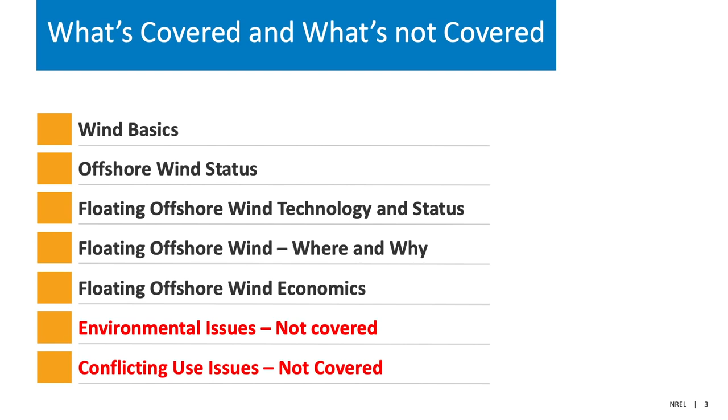I just put my bio in there. I won't cover that—Tiffany did a great job just now—but if you want to go back to this, it'll be there. I've been working with floating concepts since I started the offshore wind program, but it's really just starting to take off now.

I want to start with this first slide, which is really an introduction to the wind turbine itself. Let's look at that to start. The wind turbine configuration is a horizontal axis, three-bladed upwind machine, and I'll break that down for a minute. All commercial wind turbines fit this description, except for a few that have been built in the downwind configuration recently. But in general, this is what they look like.

The upwind configuration means they face into the wind and the wind passes through the rotor before it passes through the tower. The wind creates torque, which is the rotational force that spins the low-speed shaft, and we need to turn that torque into electricity. To do that, generally the land-based machines have a gearbox, which is the cutaway you're seeing in this picture. The gearbox speeds up that low-speed rotation and directs it into the generator where electricity is produced. So the machines all work this way.

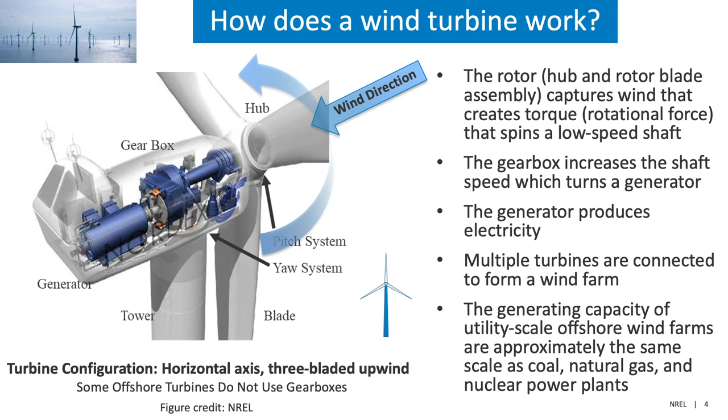The first project in the United States was the 30 megawatt Block Island wind farm, shown here in this figure. It's comprised of 5 6-megawatt turbines that were originally Alstom machines, now called the GE Haliade turbines, 6 megawatts each, installed in 2016 off of Block Island.

To this date, this is the only offshore wind farm in the United States. You can see it in the picture, especially the one to the right, in relationship to where it is on Block Island.

These turbines can provide enough power for up to 16,000 homes in Rhode Island. If you can see the island of Block Island, there aren't 16,000 homes there, so most of this power is used on the mainland. When they built this wind farm, a cable was brought to the mainland shore of Rhode Island, coming ashore at Narragansett, powering most of the homes in that region.

So this is a very small wind farm. It was the first one, and it's still operating, of course.

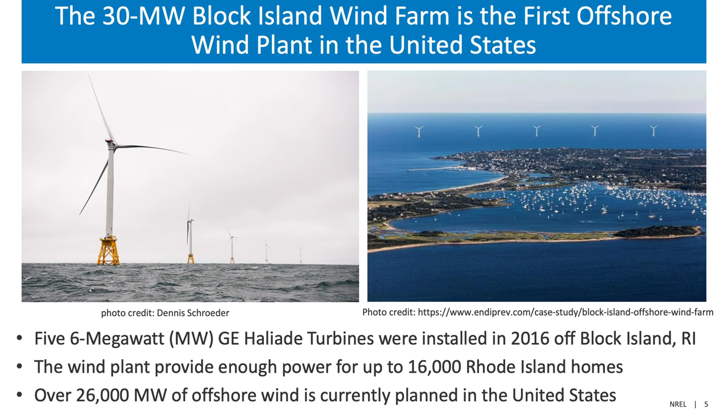But there's now over 26,000 megawatts of offshore wind currently planned in the United States. This includes, depending on how you look at it, either the regulatory lens through the leasing system, or the policy lens in which states have committed specifically to build offshore wind power in their region. Most of this is happening on the East Coast, but it's starting to spread into other areas where we might see floating wind. This is a floating wind presentation, and I'll get to that in just a minute.

So more basics. How much power does a Block Island wind turbine make? These are 6 megawatt wind turbines. They're big for land-based machines, but today they're actually becoming small in terms of an offshore project. You can see this picture taken in 2016 off a boat, and these are the turbines.

One of these turbines would have a power curve that looks like the curve on the right side. This is how all turbines generally look in terms of their ability to produce power, where the wind starts up, and this scale is in meters per second. If you're not used to meters per second, I put the conversion factor at the bottom: 2.24 miles per hour equals 1 meter per second. At 3 meters per second, roughly 7 miles per hour, you start to get enough wind to cut in. That's where it starts to ramp up.

Now it goes up in a cubic relationship in region 2 of this power curve until it reaches a point around 11 meters per second where you reach rated power. That's the rating on the generator, at which point the turbine can't generate any more power, so it starts to regulate power using the pitch control system throughout the rest of the power curve, and that's called region 3.

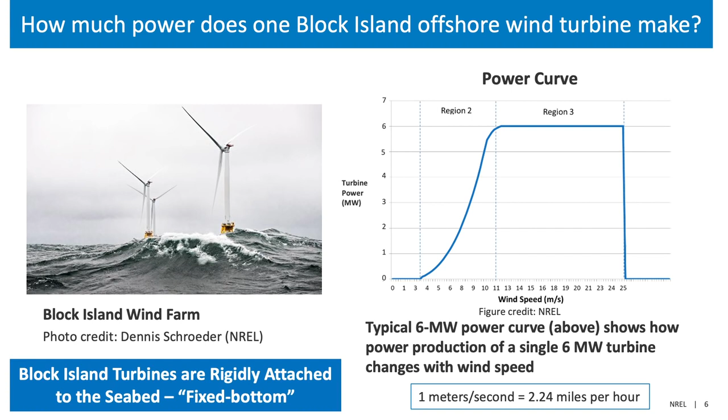So a floating machine is quite different, but a lot the same. This next picture shows some of the parts of the wind turbine that are above the waterline. A fixed bottom offshore wind turbine and a floating offshore wind turbine might look a lot the same, depending on the substructure that's used. You can see this turbine on the right is actually a floating machine. It looks a lot like the fixed bottom machines because you can't really tell if it's fixed to the bottom.

The fixed bottom machines that we use are a lot the same as land-based machines actually, but they're bigger and have much more complex support structures that have to be installed out in the ocean. They're designed to withstand the harsh conditions of the marine environment, like corrosion, and they have to be maintained in that environment as well.

The floating turbines look similar, but the big difference is that they're supported from the bottom by buoyant substructures. Those are moored to the seabed, so they're floating, but they're moored through cables and lines that connect to anchor systems.

Before I move on, I want to clear up a couple things about terminology, because people get confused when I refer to the support structures, which some people call the foundations. The substructure is actually a part of the support structure - it's the part that the tower is attached to. The support structure includes the platform, as well as all the mooring lines and the anchor system. Some people might call that the foundation, but the foundation is really just the part that attaches it to the ground. I'm using the terminology that the engineers use to design these.

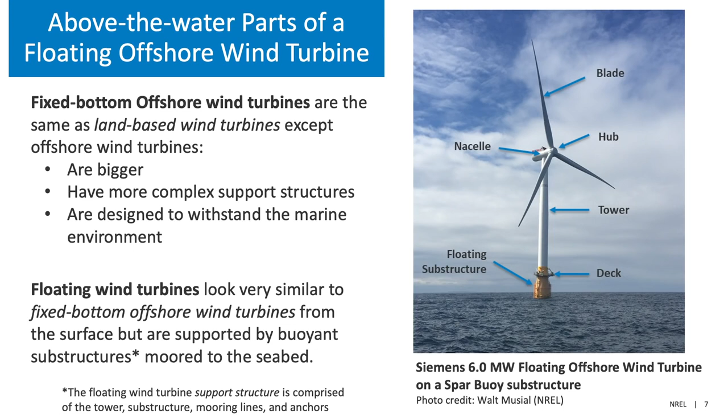When we get into the differences between fixed bottom and floating, there's kind of a cutoff line of depth. They're very depth dependent. Almost everything installed so far has been in depths below 60 meters and therefore has been fixed bottom. The new technology emerging for floating is really addressing applications where the depth is above 60 meters, and that's shown in this picture.

Below the waterline, these are artistic views of different types of foundations, different types of substructures. There's the monopile, which is the most common, and then there's the four-legged jacket, which is the kind of substructure you saw in the Rhode Island, Block Island pictures. And then beyond that are these floating systems, which I'll spend more time talking about in just a minute.

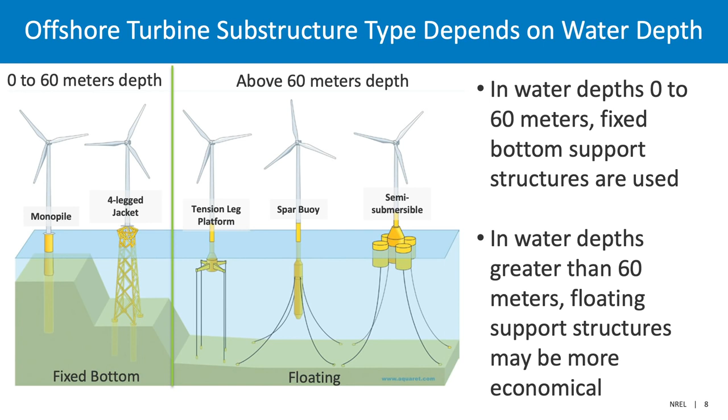Looking at this same picture on the right, if you just stick to the fixed bottom systems, there's 27,000 megawatts installed globally in the fixed bottom type. Of the floating type, there's only 82 megawatts - that's 0.3% of the total installed capacity. We're just getting started, people. That's what this slide is really telling you.

We're excited about the floating industry. The established fixed bottom industry is already going, and I included a few of the leading countries that have installed over a certain number of megawatts. These are the top 7 countries in the world with installed capacity of offshore wind, but this is all fixed bottom technology. For floating, we're just getting started.

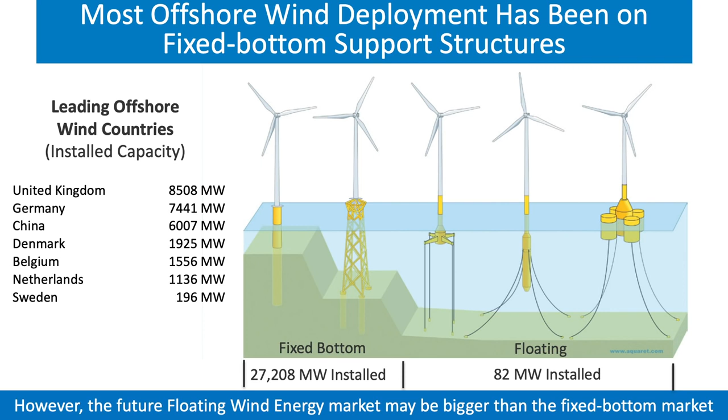So why are we excited about this? It's because 80% of the offshore wind resources in the world that could be feasibly developed are greater than 60 meters deep, which points to this technology.

If we use floating technology, we'll be enabling sites that are further from shore, more out of sight than the fixed bottom systems, and they tend to have better winds. So the economics and the feasibility of floating is in our favor in a lot of these areas.

We're already starting - we already have 82 megawatts installed, but a lot of that is just starting to accelerate right now. We expect that we'll see floating technology at the utility scale, meaning 600 megawatts to 1,000 megawatts per project by the year 2024. That's only 4 or 5 years away.

Some of the areas being considered globally are circled on this map, and you can see it's the west coast of the United States, of course, where we've done a lot of looking already. Some of the East Coast and Great Lakes, areas in Europe that are now moving in that direction, South America, and then Asia. This is going to be a global industry, and we're excited about the possibility of moving and adapting the technology for floating.

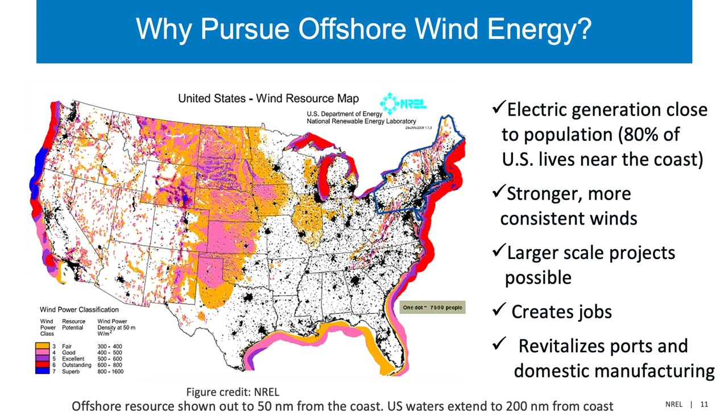By developing this industry, we're going to create a lot of jobs—I have some targets on that at the end—and it's already revitalizing a lot of the port and coastal manufacturing supply chains that were dormant from the loss of shipping industry and other things over the years. Some of those facilities do exist, and we'll be upgrading them.

Now, here's another resource map. This is the one we actually use, based on wind speed, where darker red colors represent higher wind speeds. The best sites are where the wind speeds are strongest but also where the water isn't too deep—even with floating wind, we don't want to exceed certain depth limits. So we base our resource assessments on a certain depth limit, and we've set these technology filters to do that.

So this map is only showing wind resources in areas where the water depths are less than 1,000 meters and where the wind speeds are greater than 7 meters per second. There are a few conversions there in case you prefer miles per hour or knots: 7 meters per second is 15.7 miles per hour and 13.6 knots.

Given these assumptions, the U.S. wind potential is approximately 2 times greater than U.S. electric energy use. So there's a lot of resource there, and offshore wind can contribute a lot to our total generation portfolio. Of course it's not the only thing we'll rely on, but especially in coastal communities, we can use it to supplement renewable power.

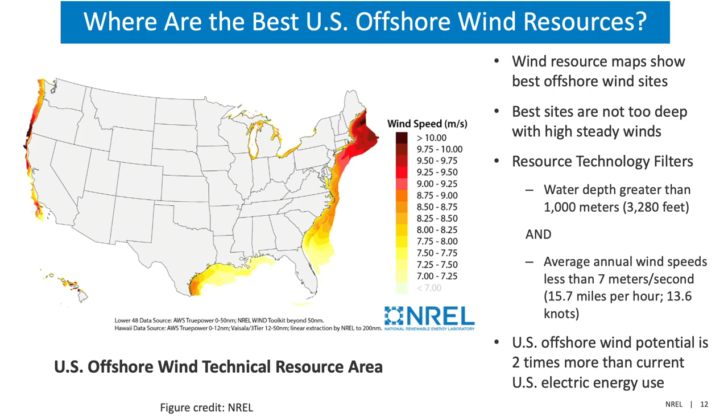I don't have a lot on regulatory, but I do want to show what's happening, and most of this is in the fixed bottom industry. These are maps covering regulatory activity in the United States—most people might recognize that I've sliced out the East Coast, the West Coast, and Hawaii here.

There's very active leasing going on through the Bureau of Ocean Energy Management, which has regulatory authority over the outer continental shelf, extending from 3 nautical miles to 200 nautical miles. Over the last approximately 8 years, they've granted 15 lease areas in the United States, giving developers exclusive site control of up to 25 gigawatts of development capacity. That's what we typically refer to as the regulatory pipeline.

We also have the policy pipeline, which is about the same—a little bit more now. BOEM has also identified 13 call areas. A call area is a potential wind energy area under public review. It might become a wind energy area, or it might not, or it might change in scope or dimensions—we don't know yet, and we haven't counted the call areas in the regulatory pipeline up to this date.

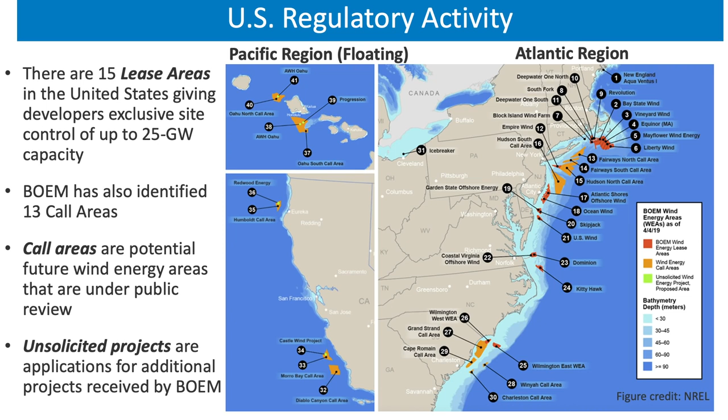There's also another category: unsolicited projects, which are applications for additional projects that BOEM has received. For any reason, a developer can submit an application for a project, but it still has to go through a regulatory process that includes some attention to whether there's competitive interest in that area. I don't have a lot more on regulatory, but that's something maybe for another topic.

So in the United States, we have areas where floating might be considered. This map was drawn in a different way, based on our bathymetry. There are two colors here: a light aqua color and a dark blue. The light color indicates areas where our techno-economic models predict that fixed bottom technology will be superior.

The dark blue indicates areas where the models indicate that floating might be superior, and you can see there are many areas where floating technology might make more sense. Of course, these boundaries can change as technology changes, but north of Boston, north of Massachusetts, the shallow water goes away. On the West Coast, there's virtually no shallow water unless it's really close to shore, and in Hawaii I'd say the same thing. The Great Lakes might stand out as having no deep water, but that's not the case.

When we did the resource assessment, we eliminated all the deep water because at the time, the resource for deep water was considered unfeasible for the technology in the Great Lakes, since ice floes and freeze-overs in the winter could potentially prevent the current technology from being successful year round. There's been a lot of talk about reassessing that position, and the technology for deep water in those conditions is considered possible by many people now.

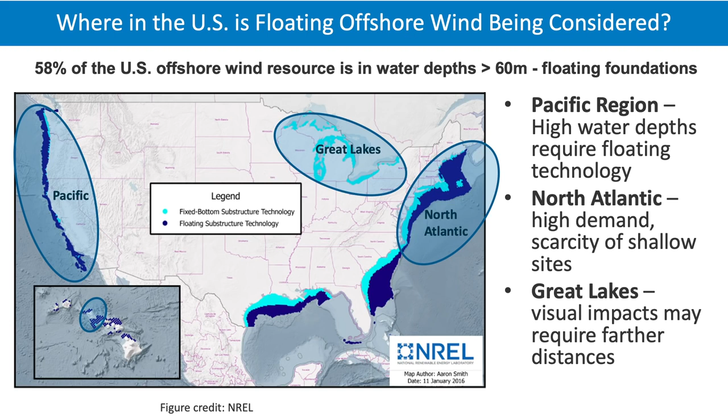There's likely to be a push toward floating because visual impacts may require further distances, especially in populated areas. So those are the areas we're looking at. There's certainly arguments for the South Atlantic and the Gulf of Mexico, but both of those regions have lots of shallow water.

From the technology standpoint, we're leaning heavily on the oil and gas experience that helped accelerate the first generation of floating wind turbine prototypes. We're past that point now and moving toward a pilot stage. The basic substructures used were derived from the oil and gas industry, but we're finding that the criteria used to design an oil rig, if used alone, can result in safe and successful designs, but they can be bulky and expensive.

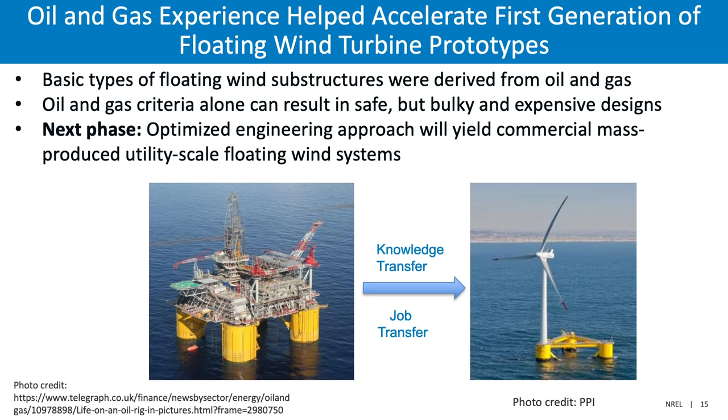So the next phase is likely to be an optimized engineering approach, which could yield commercial, mass-produced, utility-scale systems. We're seeing that right now, and there's a lot of knowledge and job transfer coming in from the oil industry. The oil industry is heavily involved in the early phases of the offshore wind industry, because a lot of those skills transfer directly.

So the characteristics of the basic floating platform types are as follows. You can see this illustration of three different types, relating to three platform types that get their static stability through different methods. One is a spar, which has a deep draft but achieves stability through ballast weights installed very low. The semi-submersible is a low-draft system with a wide footprint on the water plane where it distributes its buoyancy, challenged by high exposure to waves and structure above the waterline, since a lot of the steel has to be right at the waterline.

For a tension leg platform, shown on the far right, it achieves static stability through mooring line tension, with a submerged buoyancy tank. These can be the lightest weight systems, but the problem is they're unstable until you hook up the mooring lines, and they have very high vertical load mooring line capacity. So the anchors have to pull up at about 10 times the force of the other two, the spars or the semi-submersibles.

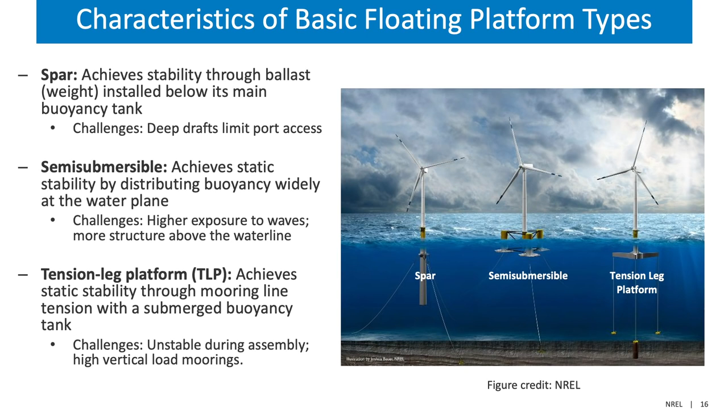From a surface view, there are two types of platforms shown here - one's a semi-submersible and one's the spar - shown so you can visualize what they look like from the top. You can tell the semi-submersible because you can see the structure. With the spar, not so much.

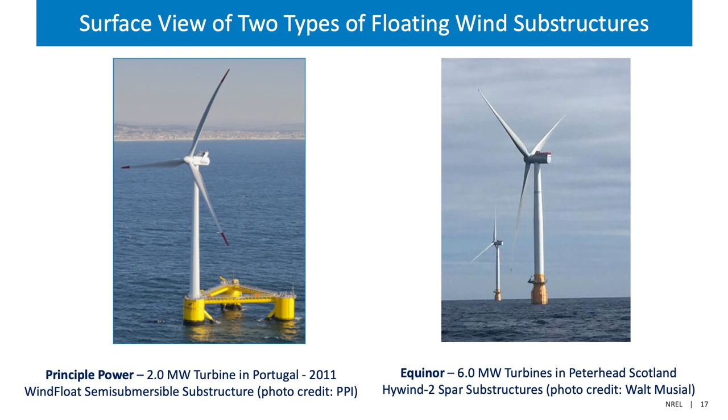So if you look at this illustration, it shows some of the other pieces now. I'm going to focus on the non-turbine equipment. We already talked about floating substructures, and the dynamic array cables connecting the turbines create a lot of the infrastructure and cost of the system.

And then there's the mooring and anchor systems that connect the platforms to the bottom, and the installation and assembly, which is not shown in the drawing, but this is really the equipment that has to be deployed to install all these, both in the harbors and out at sea. And then there's the substations, both offshore and onshore, the export cable that connects between them, and then there's some costs associated with decommissioning that happens 25 to 30 years after they're installed, because that's their expected design life.

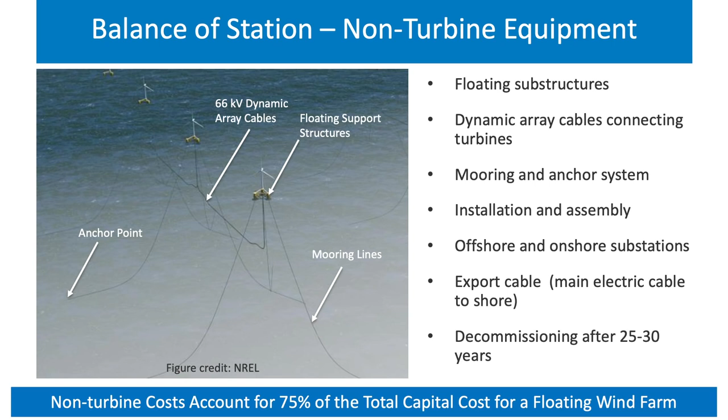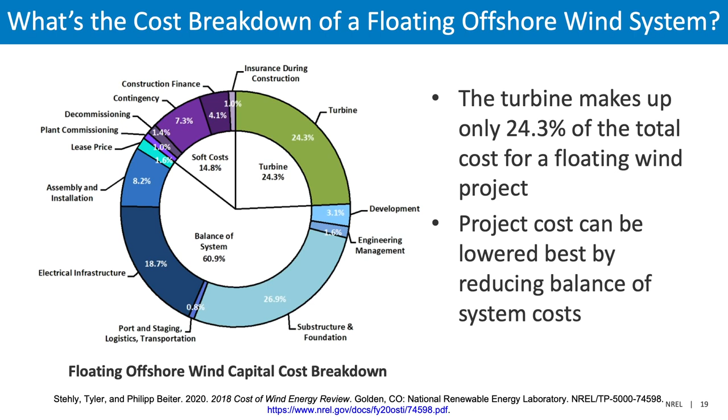So focusing on that bigger part of the pie is the best way to lower the system cost or the project cost if we're looking ahead to reduce costs. So I'm just going to go through some parts of the wind farm that we already talked about, just so that we have a better technical understanding.

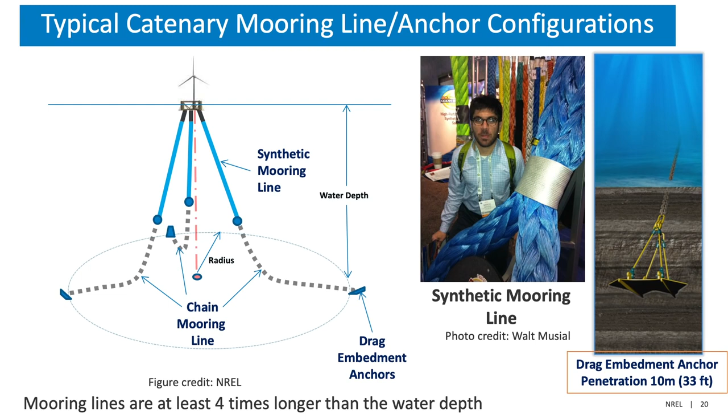Now this is a new innovation that allows us to lower the cost of the wind plants. The electric cable costs will increase as the turbine spacing increases, and decrease with turbine size, because with fewer or larger turbines, you need to connect fewer turbines, and the cable costs go down. But the exact spacing of these turbines is really a trade-off between wake losses that happen in between the turbines and array cable costs. So the larger the spacing, the more cable you need and the more expensive it gets, but you have less energy losses.

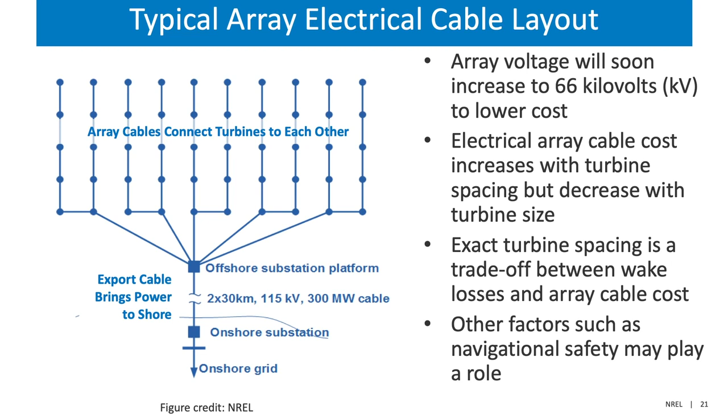So other factors also could play a role, such as navigational safety, and this has been brought up in some negotiations earlier among projects that are going in on the East Coast. So this is something that needs to be discussed, and it's not really part of this discussion here.

But I do want to touch on how turbine spacing is determined and how it might change as projects get bigger. Turbine spacing is based on the rotor diameter, which is the diameter that the blades sweep as they turn around. One rotor diameter on a big GE machine is 220 meters. But to create adequate spacing, the machines have to be somewhere between 6 and 8 diameters apart. I've seen projects as low as 4 diameters, maybe up to 10, but typically in between that.

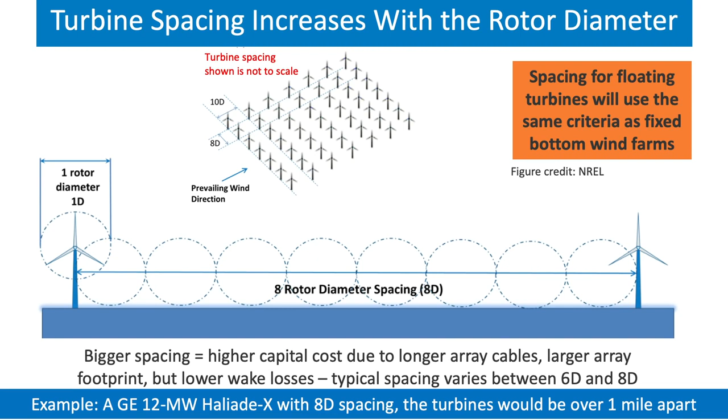I guess that's all I'll say about that, except for the fact that when we go from these fixed bottom arrays to floating, we're going to use the same criteria and the same physics results. There's some advantages we can talk about, but I'm probably not going to get to that today.

Well, how big will that circle be? It really depends on the design. It depends on how long the mooring lines are, the water depth, the design of the mooring system, and also the turbine size. So you can appreciate that the turbines aren't necessarily exactly fixed in space.

They can move in actually 6 degrees of freedom as they're anchored to the sea bottom. And that can affect some things, but generally the platform's job is to control that motion and to make sure that the turbines are protected from excessive wave action and things that might damage them or cause additional fatigue.

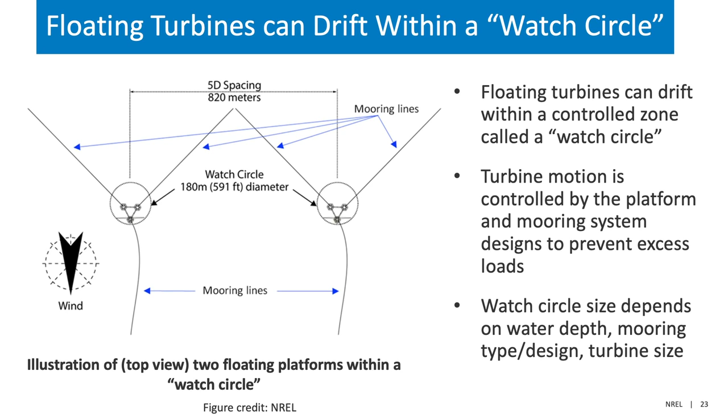So all these turbines have dynamic array cables. That means that the turbines are moving, the platforms are moving, and we have to protect that power cable from bending and breaking because of those turbine motions.

So there's all kinds of protection systems that are involved in the dynamic array cable to protect the static part of the power cable from seeing all those deflections and motions. They help to isolate the cable from those platform motions.

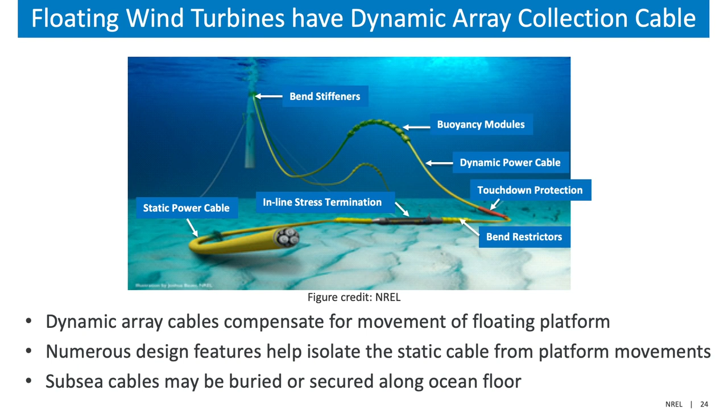And then those subsea cables can be buried, which they typically are for fixed bottom systems, or if it's really deep, they may just be secured with a mattressing system or some other means. And that's part of the design.

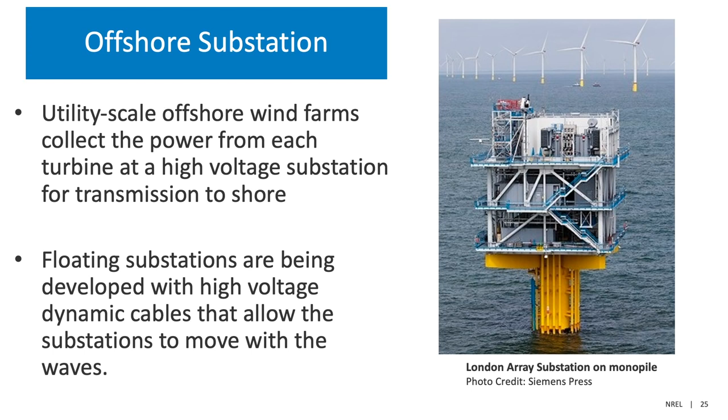They all connect to a substation. Now, I don't have a picture of a floating substation because I don't think there is one that has been built yet, but we're working on the same concept as this one. This is one from the London Array, a fixed bottom substation. Chances are a floating one will look very similar, but it will have dynamic array cables attached to it. These are under development right now.

A big part of floating, and a big difference between floating offshore wind and fixed bottom offshore wind, are the port and infrastructure requirements. We envision that floating systems will be mostly assembled and constructed at quayside or at a wharf facility, meaning a lot of the assembly and commissioning will happen there too. That's a good thing because it will avoid a lot of the labor at sea, which is very expensive and can be more dangerous than labor conducted in the harbor.

So we need wharf facilities that are adequate, and they need to probably be upgraded or built from the existing ones. We need a navigation channel and wet storage that will allow the tow out of a system with the drafts that are being designed. And most of the platforms designed so far are semi-submersibles because they gravitate toward low draft systems that are easily towed out.

We need an upland yard for laydown and storage and staging of the parts. We need cranes with very high capacities, not just in how much they can lift, but how high they can go. The crews and access for maintenance don't have to be co-located in the manufacturing ports, and they don't have the same restrictions. A lot of these assembly ports need to have no overhead obstructions, such as bridges, so the whole assembly can be towed out in one piece.

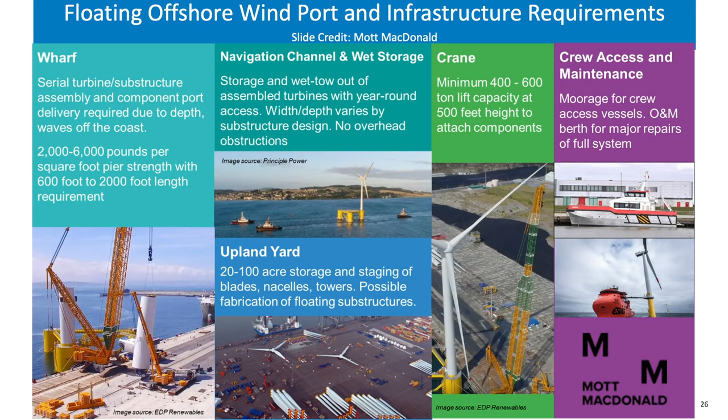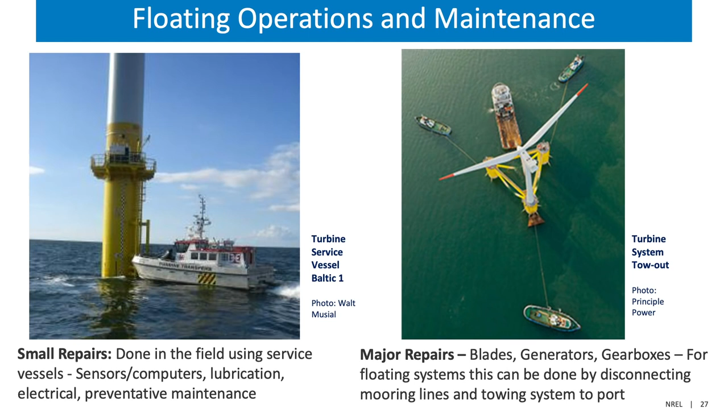So for floating operations and maintenance, we see there are 2 categories I've divided here. One is small repairs, where the turbine will be boarded directly by the maintenance crews through small ships. If it's a major repair, they can be disconnected from the mooring lines and towed into their construction or maintenance facility.

And most of these were very successful and produced the energy that they were expected to produce. But that phase is really over now, and we're really entering a pre-commercial phase, which began a while back.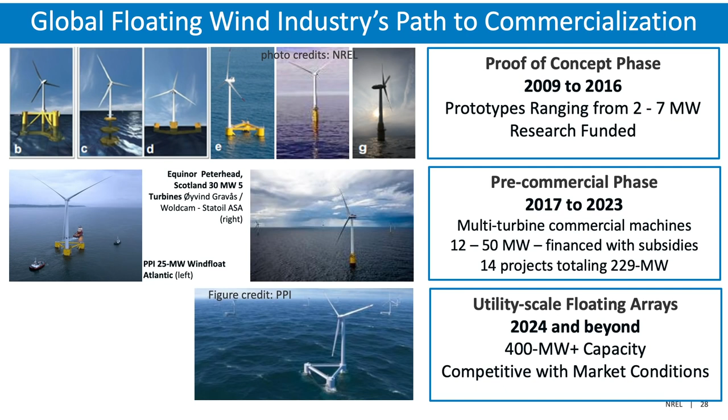Leading some of this is what I mentioned earlier, these hybrid systems, which will be hybrids of the 3 archetypes shown in the earlier picture, where they overcome some of the shortcomings of the other platform types by combining features of the different types. What's needed, for example, is a low draft to enter typical port facilities, but a stable platform that can be deployed on station. Some of these concepts I'm showing here are already in development and part of the pilot projects being deployed in Europe and around the world.

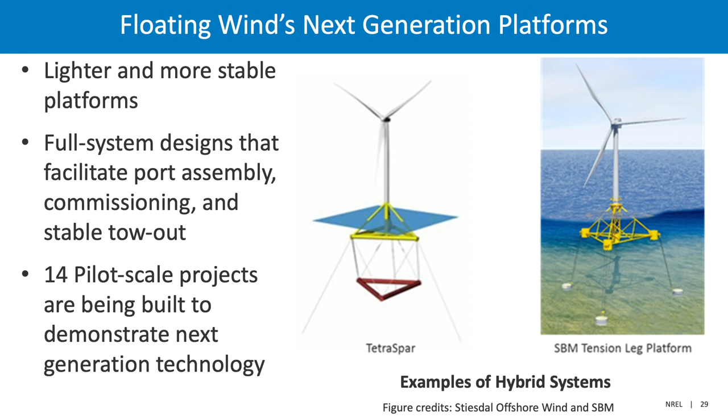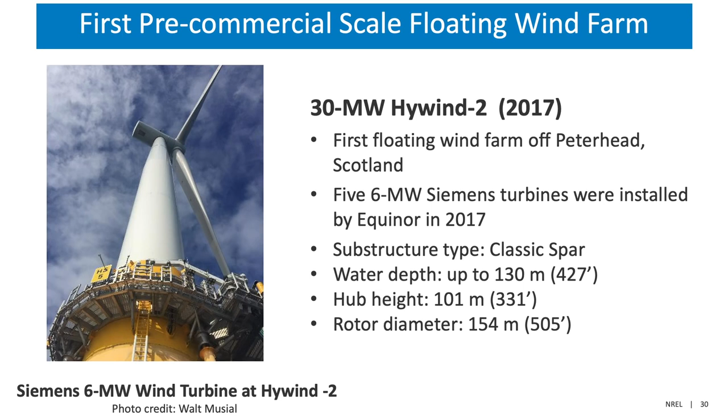Here's a couple examples of these projects, and I don't want to spend a lot of time, but the first project was also Equinor, a 30 megawatt 5-turbine project using Siemens turbines off of Peterhead, Scotland. There's a picture of one of the turbines from a boat. This project is operating fantastically, as I understand it, achieving capacity factors higher than expected. It's doing really well.

This is a brand new project, Windfloat Atlantic, that was just installed this year. They produced first power on December 31st. It's a 25 megawatt 3-turbine project near Porto, Portugal. You can see this turbine being towed out to station - no heavy lift vessels necessary to get this on station. We're waiting anxiously to see how this one performs.

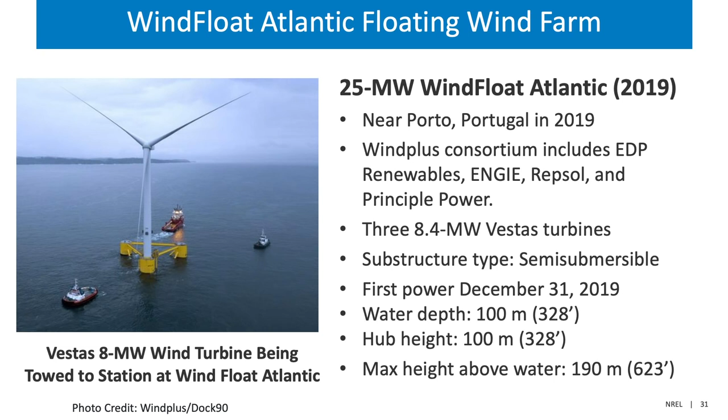So now I want to talk about cost, and I want to make sure I don't run out of time doing it. So I'm trying not to rush here, but how do we predict the cost of a floating wind turbine, especially when the commercial systems haven't arrived yet? We've been working this question for many years now, and I'm going to try to explain in a few minutes just how that's done.

So only 82 megawatts of floating wind has been installed so far, and there have been no utility scale projects built. We've done some studies to show that at the pilot scale, which is about 1/10 the size of utility scale, the costs are at least 3 times higher than what we think the commercial costs will be. This would be true for a fixed bottom system or a floating system. It just works out that way because there's a lot of fixed costs you have to pay for whether the project is big or small.

So the cost estimates that we use to get us to the commercial scale costs of floating wind, we rely on the market data that we get for fixed bottom systems to validate our system. We also use the U.S. power purchase agreements that are being negotiated now, and we do analysis on those to see if the European projects and the U.S. projects are in the same ballpark.

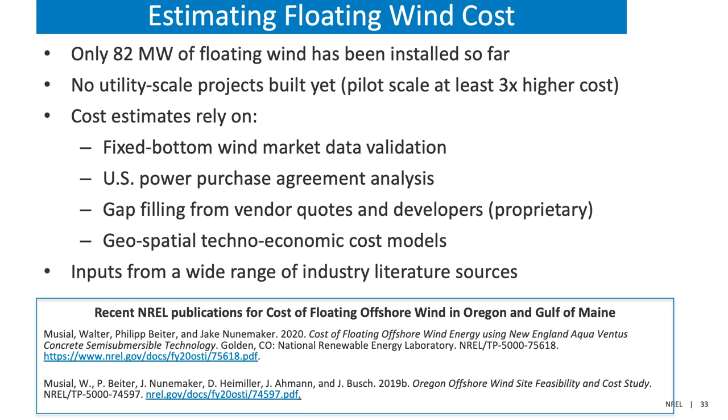If you want to read some of the publications that have been done, I've put a couple in. There's a report we wrote on the cost modeling of floating offshore wind for the New England Aqua Ventus concrete semi-submersible, published in January this year. And there was another report we did for Oregon, sponsored by BOEM, looking at the costs of offshore wind at feasible sites in the state of Oregon. You can access those online.

Here's what the auction prices in Europe have been doing over the last 5 years, and it's what's gotten people excited. These prices have come down very rapidly, about a 70% decline, and that's creating the motivation for a lot of the policy commitments that are based on the fact that cost and price are related. So why are these prices falling?

A big part is because technology is improving. Larger turbines are enabling some of the cost reductions. We're also seeing lower risk because supply chains are maturing and people are getting more comfortable with the operation of these projects, which are performing as they should be. And through increased competition in the auction process, we're seeing competition among developers to help bring these project costs down. There are other reasons why these prices are falling, but those are the big ones.

When we compare power purchase agreements in our analysis in the United States for the early projects now coming in, we're not seeing a huge penalty between the European prices and the U.S. prices. You can see the Vineyard Wind analysis is plotted on this curve, and it's right there in the middle of those data.

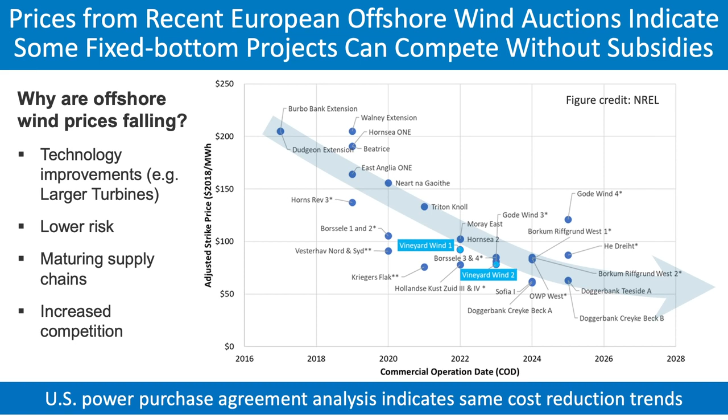So this is kind of a simplification of what costs are doing and what our models have been showing. You can see that because fixed bottom and floating share supply chains, turbines, array and export cables, the regulations we use, and port and infrastructure facilities to a large extent, and O&M and maintenance can be synergistic with each other, and that's driving floating costs down along with the fixed bottom costs.

You can see in the bar chart that the models are suggesting that we can hit - and this is not an NREL analysis, but the models suggest - that 5 cents per kilowatt hour for fixed bottom offshore is feasible globally by 2025. Some of these projects are coming in without subsidies right now.

So what does that mean for floating? In our models, by 2030, we think in a lot of the areas where we're deploying or want to deploy floating offshore wind, we can get to 6 cents per kilowatt hour, even below that if the wind regime is really high. So you can see there's a lag of about 5 to 7 years between the fixed and the floating curves.

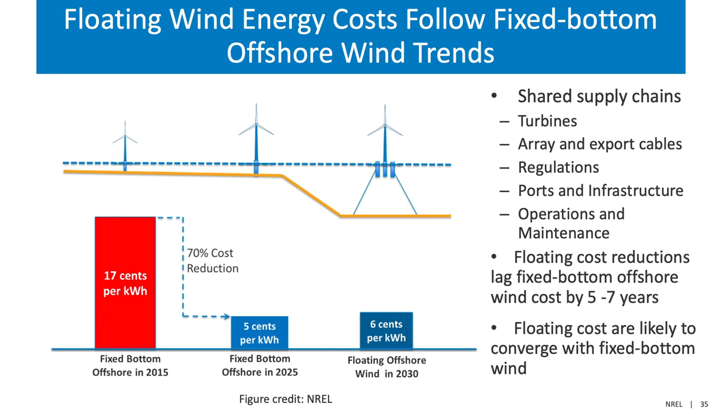But generally, there's nothing in the floating cost equation that would make floating more expensive. So we expect the floating costs to converge with the fixed bottom wind costs over time, and that will probably happen just after 2030, according to our models. But others might have more aggressive thinking about that - it's possible that might happen sooner.

This is being driven by a few different factors. Offshore, there are fewer installation and transportation constraints than there are on land, so we can do it. But larger turbines lower project costs, and that's a given - we've seen that, we can demonstrate it, because it really lowers all of the balance of station costs incurred through the array cables and O&M, and more energy is produced, so that is reflected in the cost curves. Fewer turbines are also cheaper to maintain, and what we haven't seen is a hard limit to this turbine growth. But it does take a lot of technology to advance to a larger platform, so it does take time for us to move through this. I'm not sure how large turbines will get, but we're pretty sure they'll get to 15 megawatts at some point.

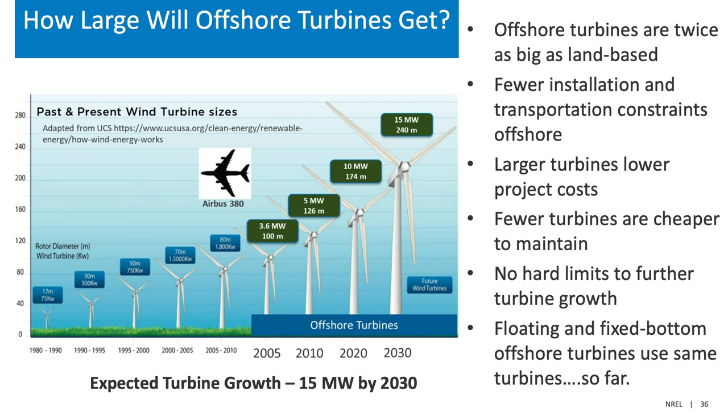For comparison, one of these 12 megawatt Haliade X turbines could power 4,000 to 4,500 average U.S. homes, depending on the wind regime. They may be even saying more, but that's what I calculate, and that's quite a bit for one machine.

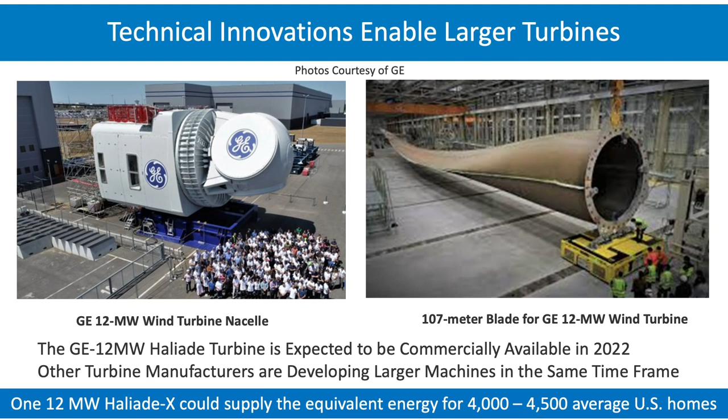Finally, I want to talk about economic impacts associated with offshore wind. DOE did a study in 2015 that looked at offshore wind, and we estimated that about 80,000 full-time equivalent jobs would be created by 2030 by the offshore wind industry.

Economic benefits from jobs is certainly one thing, but there are other synergies that can help other renewables grow, like solar, which only creates energy when the sun is out. Wind can blow 24 hours around the clock, and sometimes at night wind is even stronger. So coupling offshore wind with solar might be a match that helps generate even more energy and helps offset the times when solar isn't able to produce power.

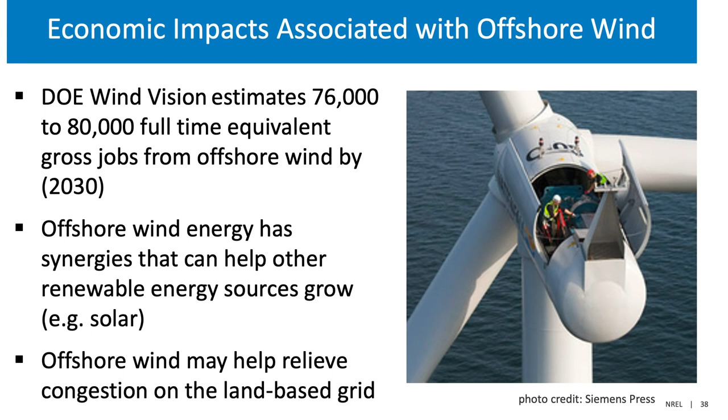Offshore wind's also putting power in on the low congestion side of the grid. Offshore wind transmission from the coast can offset congestion that's already building up on the land-based side of the grid. This has been shown in a couple different studies, but more work really needs to be done in this area.

Key takeaways: I talked about the resources and showed that these resources are very close to population centers, meaning we're going to generate power where it's needed and used. 80% of the global offshore wind resources in the world are suited for floating offshore wind. So floating could become a much larger part of the offshore wind industry than fixed bottom in the long term, simply because there's more resources for floating, more geographic areas for us to go to.

Floating offshore wind is expected to be deployed at the utility scale, up to a gigawatt scale project at a time, by 2024. We're seeing this happen right now. There's a lot of planning actually going on right now, including one project in Korea I could point to. So this is something that's happening.

The cost of fixed bottom offshore wind has decreased 70%. A lot of people may not have heard that, but it's now able to compete in some electricity markets without subsidies, as some European projects are showing. That may be true in this country someday as well.

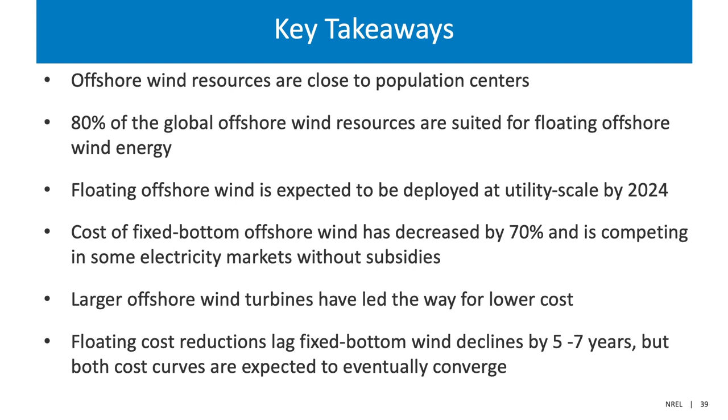And I think that's my last bit. So thanks for your attention.